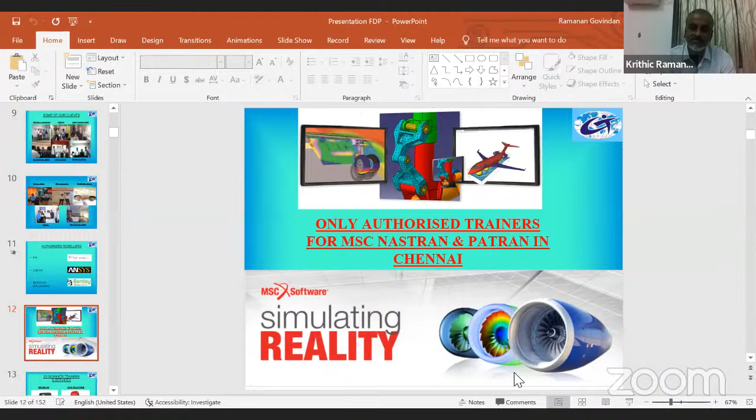And apart from software, we are into hardware too. We are into 3D scanning and 3D printing, which is dominating in today's industrial world. Scanners are widely used in industries for two different purposes: one is for quality checking the product, another is for reverse engineering of parts. Now we have two different scanners—one is Sense 3D, another is the XYZ scanner. Both are handheld scanners.

Now industries use robotic scanners, automated scanners, since the precision is very high and the accuracy is superb. So these are some examples—I have a small video about how scanning is being done in industries.

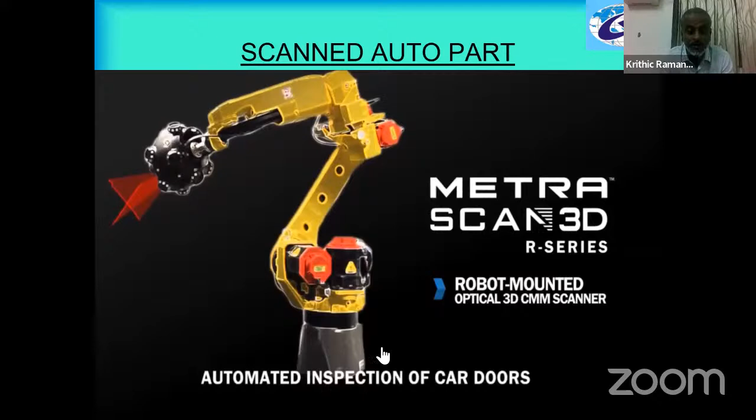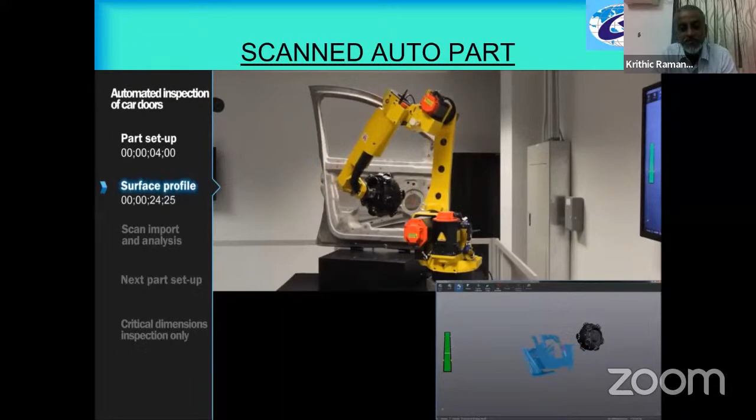This is a simple industrial automated scanner which scans an automotive part, a car part that has been manufactured. To check the quality of the part, in previous ages it was manual testing—we used to check manually using manual measuring instruments, and the accuracy was not that high, so rejections were more when manual testing was done. When automated scanners are used, you can see it is more precise, and the biggest advantage is you need not dismantle the part, which saves the cost of any parts you manufacture.

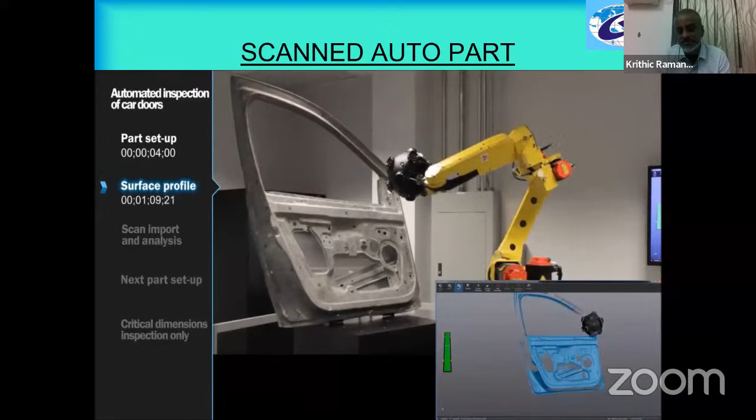Now this is going to be the first prototype. When you scan it, you can understand its assembly interferences, its assembly distances, the weaker areas, and the defects in the design. So anything that has been done or compromised can be analyzed using these robotic scanners available in the market today.

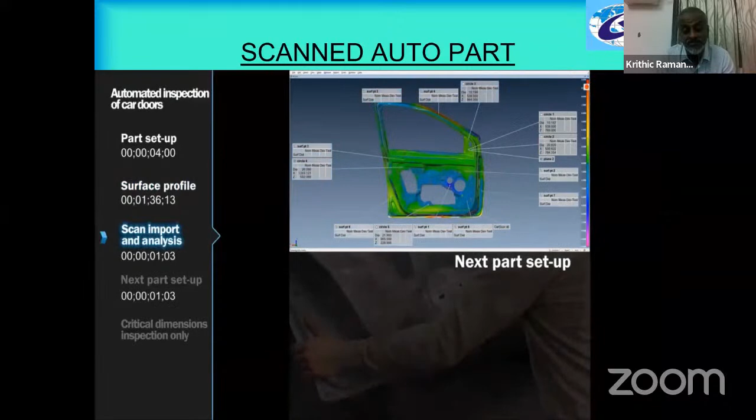So the biggest negative of the rise of scanners is the job market. The job market for men and women, especially in the quality control department, has been deeply compromised because of the introduction of scanners today. So you people have to be versatile in using scanners rather than getting into manual measuring jobs. This is one beautiful example of how scanners are industrially used.

And apart from quality control, what a scanner can do is scan the part, and you can import the scanned object into CAD software like Creo, CATIA, SolidWorks, and any 3D modeling software. You can import the OBJ or object of the scanned part, and that can be converted into a dimensioned part. That is the biggest magic of CAD software—whatever you scan, you can import it into CAD software, convert it into a parametric model, and manufacture it.

So that is where reverse engineering plays a big role, and reverse engineering is one area which all the industries are more focused into, because it's almost like copying.

When me and my partner, we went to China once for a fair called the Canton Fair. We witnessed a lot of Indians visiting the Canton Fair to buy recent products in China, maybe in the agricultural side, the construction domain, or the automotive domain. Very recently developed parts are being bought by industrialists of India.

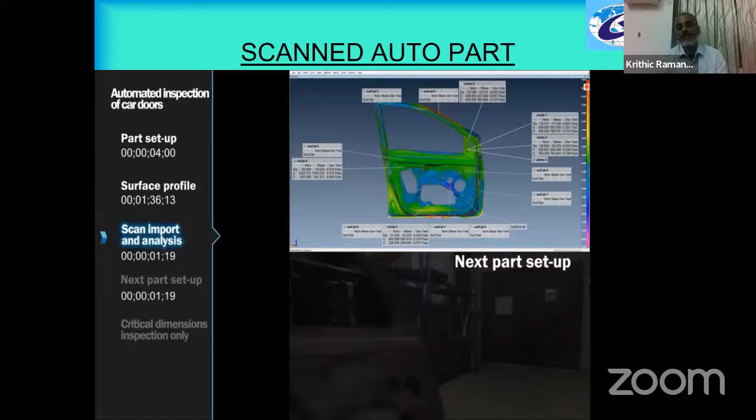When they need those parts, they use scanners to scan them, convert it into an object, import the OBJ into CAD software, do parametric design, and manufacture it. So that is where reverse engineering plays a big role in today's scenario.

That is why I wanted to explain so much, to help you understand the importance of the scanner and the importance of gaining skills and knowledge in using a scanner.

Now, apart from scanners, we are also into 3D printing.

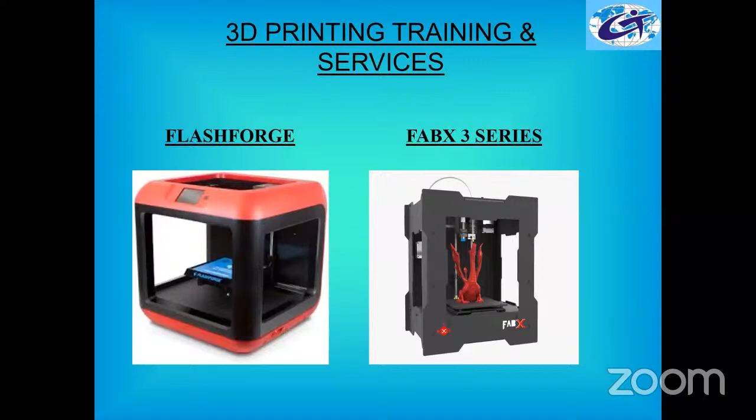But in aerospace, the volume is very less. Aircraft manufacturing companies are going to manufacture 1 or 2 aircrafts in a year probably, so the parts can be easily 3D printed and used.

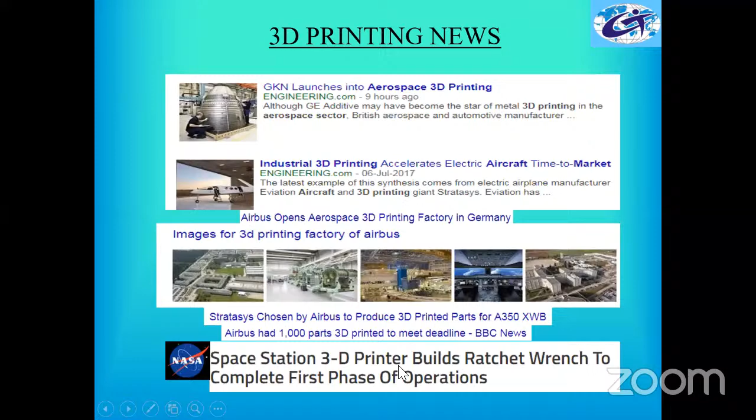Big IT giants like Wipro are into 3D printing - Wipro 3D. HP is into 3D printing machines, and HCL is into additive manufacturing. In fact, HCL has a big 3D printing factory in Bangalore. They have taken orders from various companies and use this factory to 3D print many parts, especially in the aerospace and defense sectors.

We know HCL, Wipro, and HP as IT giants, but they are into engineering services also. This is very good information for engineers to be aware of how these IT sectors are into our CAD domain. It's unfortunate that we people are not focusing on these techniques and getting into such domains. We are more into academics, searching for jobs nowhere connected to us, especially in IT. I humbly request all mechanical, automotive, production, and aerospace engineers to focus on these areas where you have numerous opportunities. But the only thing is, you have to be skillful.

So this is about the 3D printing news. Of course, the project which we have done for a company is Al Jazeera Home Appliances, a Saudi Arabian based company.

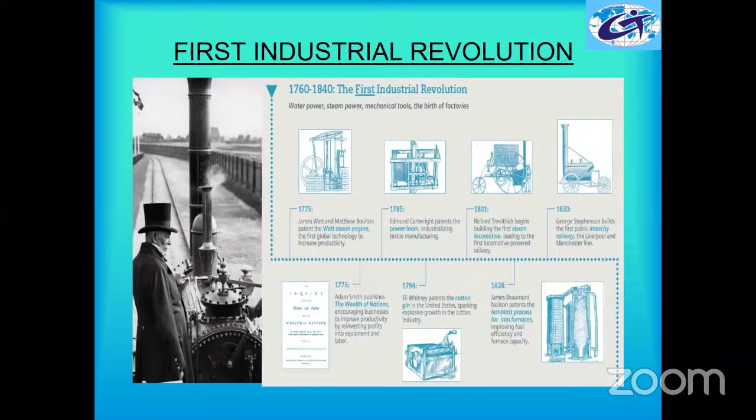So the first industrial revolution was in 1760 to 1840, where water power, steam power, mechanical tools, the factories came into existence. You can see here there are a few examples which we have cited. In 1775 it was the Watt steam engine, 1785 it was the power loom, 1801 it was the steam locomotive, 1830 it was the intercity railway. So these are the few examples which we have cited for the first industrial revolution, which happened during 1760 to 1840.

The second industrial revolution was during 1840 to 1914, where mass production was introduced, because mass production played a big role. Just imagine when you need mass production, how it can be controlled. That's a big thing which people have to take into account. It is not as easy as you think. So when mass production was introduced, Henry Ford started a moving assembly line. And it's very unfortunate that Ford has shut down their car manufacturing division in India, especially in Chennai. So anyway, we are hoping for their electrical vehicle division again. So let us hope for the best. But just imagine, in 1913, Henry Ford introduced the moving assembly line, and in Chicago, the moving assembly line, especially in the meat packing area, was introduced.

Of course, the first wireless communication system was introduced in 1929. So in this particular duration, 1840 to 1914, mass production, the assembly lines, and electrification were introduced to us.

So the third industrial revolution was obviously the digital revolution, a birth of digitization took place. The first mobile phone cellular call was placed in 1973. In 1973, that was my birth year, so now I am 49 years old. Just imagine, before 49 years, the first cellular mobile phone call was placed. So 1947 to 2010 was the digital revolution.

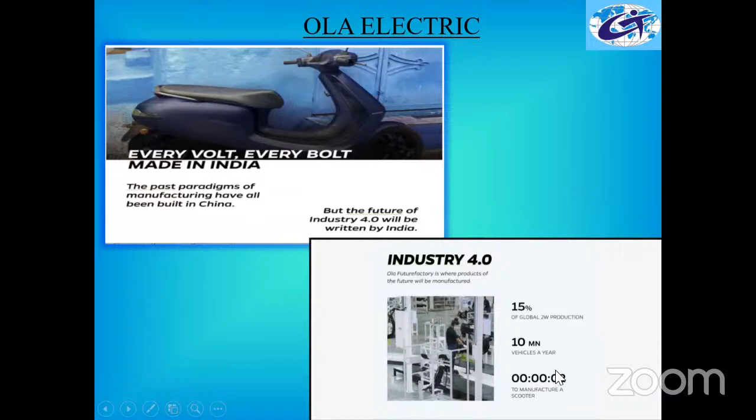And in Industry 4.0, you can see 15% of global 2W production, 10 million vehicles a year, and to manufacture a scooter they take just 2 seconds. So this is what Industry 4.0 does - the time consumption for the product to reach the market will be very less, the profitability of the industry will increase, and you guys have to play a bigger role in this particular environment.

Okay, now I'll get into the basics. I think we have time, I think we have a lot of time. Yeah, we have another 40-45 minutes, isn't it, sir?

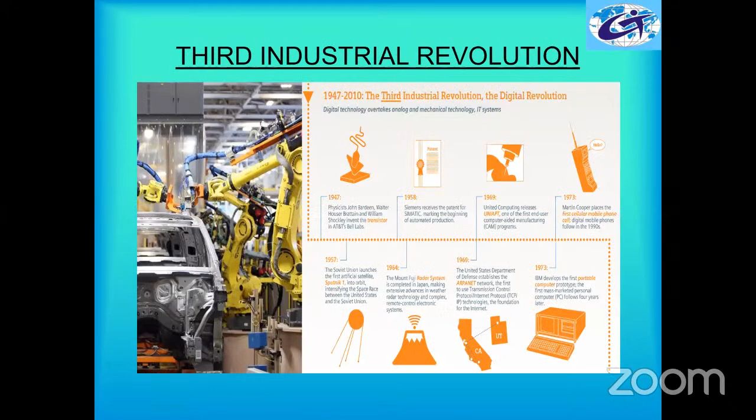And this is the overall dimension you have to maintain. So create a box of the overall dimension, and you have to tune the design which you have done so that the final design is achieved. So conceptual design plays a bigger role in industries today.

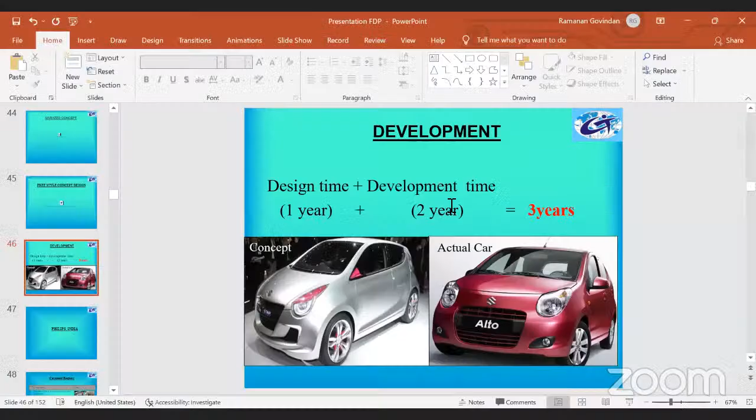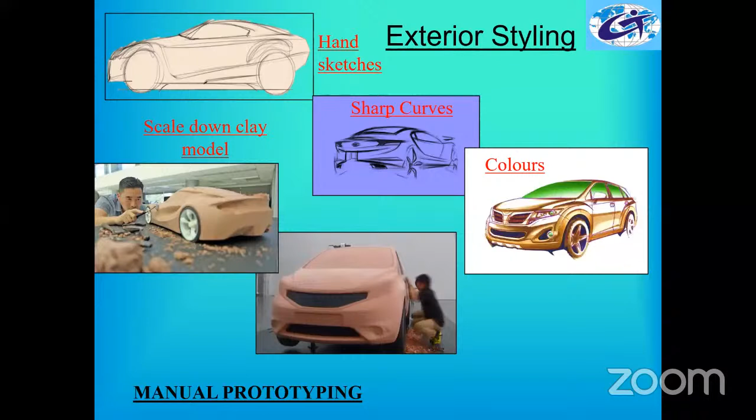This is where I was more particular about insisting to students that there are a lot of openings in R&D, because today, as you all know, electrical vehicles are going to play a big role in the market. So conceptual design of electrical vehicles is very, very important today - the shapes, the aerodynamics, the weight, the battery area - everything plays a big role, and guys who are really good in it are definitely in demand in the market today.

Now, I would like to show you how this conceptual design is being done using softwares - a simple presentation about how they are doing it using the softwares.

Just creating the curves, very easy using the software. This is a rough model, not an exact model. So designers use a sketch tool to sketch the concept of the model they've developed. Especially hand sketches, they convert it into a rough three-dimensional model using a sketch tool. They just free-form it, and use surface design to pull the shapes.

This is how industries do it today. These tools play a bigger role in the market, used prior to the CAD tool. They use such tools to get the shape before the CAD tool, and there are possibilities that these surfaces can be imported into the CAD model.

This is the information I want to share about conceptual design in industries - the software used in developing freeform surfaces, so that the complete car model has been done dynamically. Now in R&D, when they develop an automotive concept, the design and development time takes around 3 years.

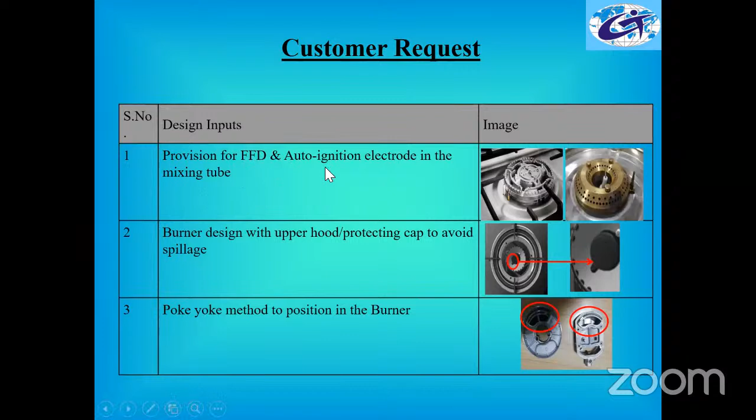This is one conceptual design we did for Preethi Home Appliances - the provision of a flame failure device, auto ignition electrode in the mixing tube, and the burner design with the upper hood. These are some of the modifications we made in the existing design of gas stoves. For the flame failure device and ignition electrode, this technique is called poka-yoke - a Japanese technique where you can place the burner on the hood.

So we have to place the burner on the hood so it gets fixed and shouldn't be easily taken away. That's why we use a technique called poka-yoke.

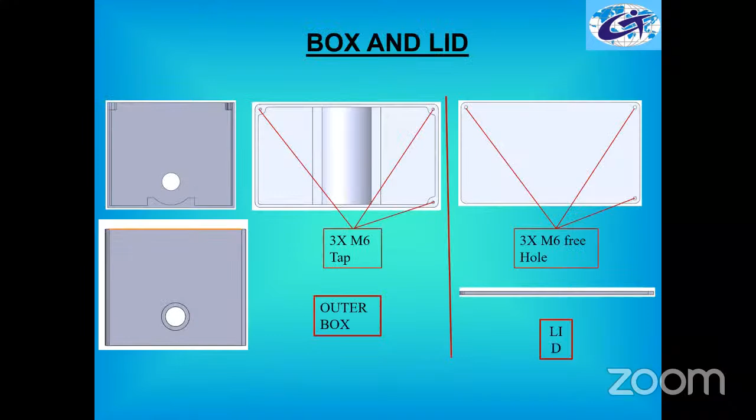This is another design we did during the COVID time - a ventilator design for a client. This project was submitted to the state government, and they 3D printed this particular part and submitted it to the government. We played a big role in designing this particular ventilator.

The next concept I'd like to discuss is reverse engineering, and after this I'll get into the software. As I mentioned earlier about reverse engineering using scanners - you can scan an automotive part, develop the part, and incorporate it into recent vehicles. So reverse engineering is one area where you can re-engineer components.

Now here, this is CMM data - CMM is coordinate measuring machine data of a helmet. When a helmet has to be reverse engineered, can we take the dimensions of the helmet? No, it's difficult. You cannot take dimensions of any component that way. There are only a few parts that can be dimensioned using vernier, scale, or other manual measuring instruments, but apart from that, all other components cannot be dimensioned - they are aerodynamic in shape, and such shapes have to be dimensioned using measuring instruments.

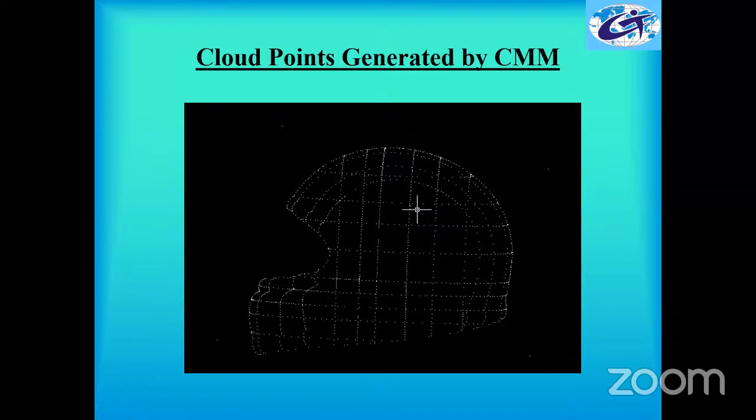I think Sairam groups have a CMM machine also in the college. So this particular data is a CMM of a helmet - you can see it's been taken as points, all three-dimensional points. You can rotate these points in the software, and it will look exactly like a helmet, but these are all just points.

So these points have to be imported into CAD software like CATIA. We imported this in CATIA, where we can convert these points into wireframes - we call it wireframe design. You connect those points to create smoother wireframes. The wireframes have to be smoother, and that's where the designer has to play a bigger role.

Now these smoother wireframes can be converted into surface designs. You can see here, this is a surface model. A surface model is a volumeless model - it doesn't have any thickness.

But converting it as a smoother surface plays a bigger role. It needs a lot of patience and intelligence. You cannot make it smoother just like that, you need a lot of techniques. So software helps you to create smoother surfaces.

Now this is how the helmet can be created in CAD software, from reverse engineering data to the CAD software data. After creating this reverse engineered model, I'm getting into the next concept.

So we were talking about CAD, product development, 2D to 3D conversion, conceptual design, and reverse engineering. These are the three techniques through which you can design the part. So the component is being designed now, I'm talking about the helmet. We have reverse engineered the helmet.

What is the next step after design? The next step after design is CAE. We have to validate the helmet. Whatever component you are designing, let it be anything, you have to validate the part so that it withstands the loading conditions.

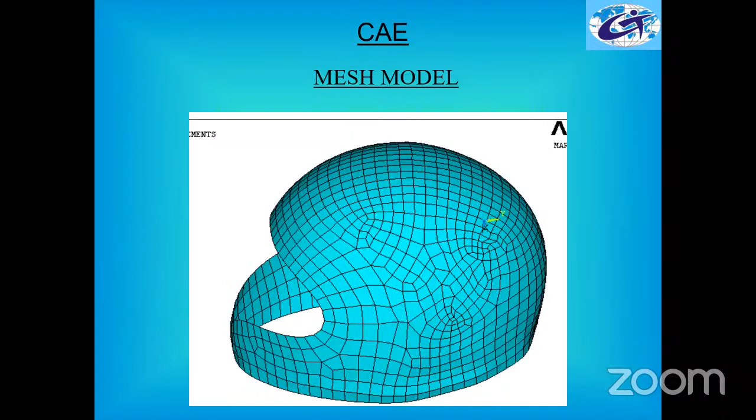Now here, the helmet has a specific purpose. It has to withstand load, it has to be aerodynamic, it has to be lightweight. So keeping these things into consideration, we have to decide the material and the design. So after the design is over, you have to go for validation.

Now here we are doing a drop test for the helmet to find whether it can withstand the load, because the purpose of the helmet is very clear: it has to withstand impact and reduce damage to the skull. So we do a drop test. If the helmet is fine, then we have to go for manufacturing it.

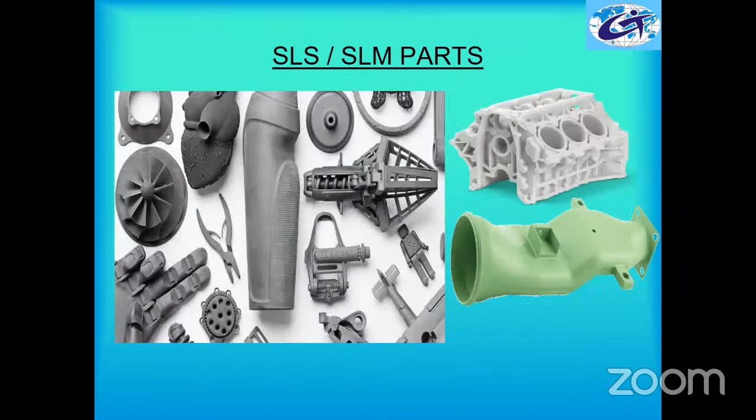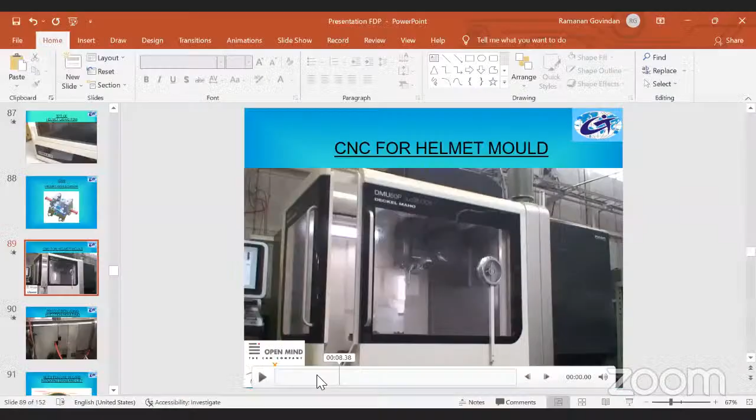So when the mold design is ready, I have to go for CNC manufacturing of the mold. The mold has to be CNC manufactured, so I have to write the G codes and M codes in the software. We call these the CNC codes for the mold, and that particular mold can be manufactured using the CNC machine. So this is where additive and subtractive techniques are being used.

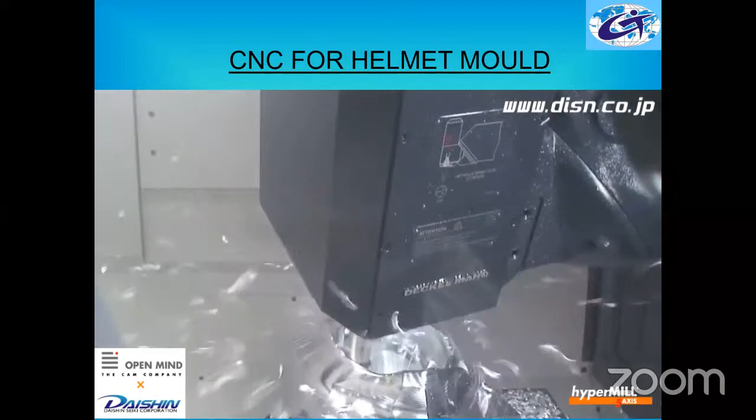So subtractive technique is used here in manufacturing the mold of the helmet. Additive was used in taking the prototype of the helmet. Additive is nothing but adding material, I added material and developed a 3D printed part of the helmet. Here I am subtracting material and creating the mold for the helmet. So this is how the helmet mold is being manufactured.

So after the helmet mold is manufactured, I can get into the next thing, which is called the injection molding of the helmet. You can see here the mold which has been CNC machined is being loaded in the injection molding machine, and you get the molded part, which is the helmet.

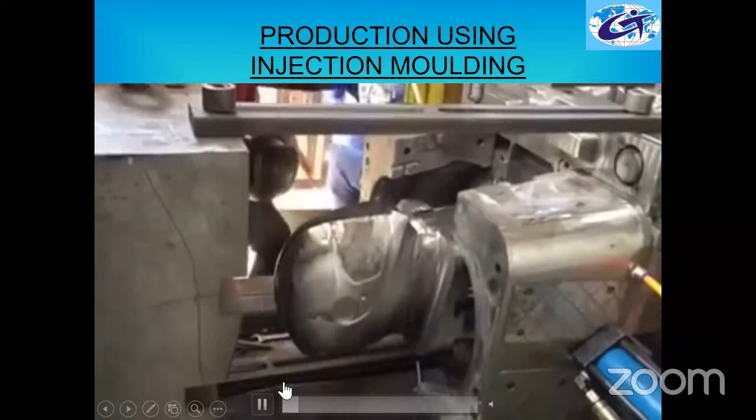So this is how helmets are being 3D printed in industries, molded in industries. You can see this is the complete mold which has been manufactured using the CNC. So in the injection molding machine, as the mold opens, the helmet is being manufactured.

So this is how the complete CAD/CAM/CAE process is being done. Product development is CAD, product validation is CAE, and CAM is used to manufacture the mold of the helmet. After the manufacturing is done, the mold is loaded in the molding machine, and the helmet is manufactured.

So this is a very small example which I want to cite for CAD/CAM/CAE and this application. Now I would request Karthik sir to share his screen.

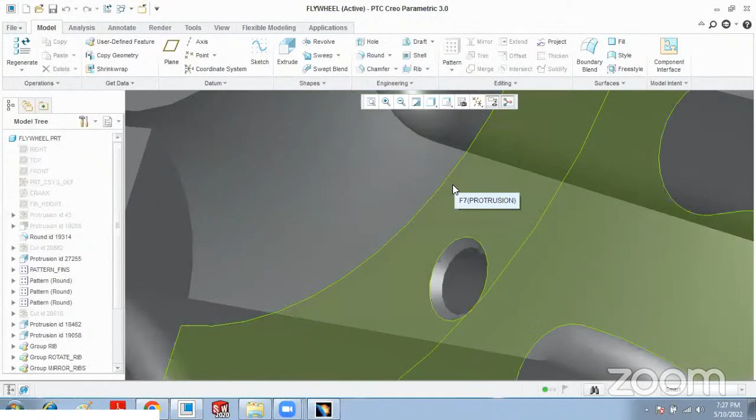So that we can show how softwares are being used to design components. Initially we will be showing you Creo, where Karthik sir will explain how simpler parametric 3D modeling designs are done. After that we'll get into CATIA, where we want to show how conceptual design is done in industries. We planned for 3-4 softwares, but as time is limited, we'll show you the two most dominant softwares in today's manufacturing world.

Now this is Creo. This is a simple industrial flywheel. Karthik sir will show how a few features of this flywheel can be designed using Creo software, along with a simple introduction to the software.

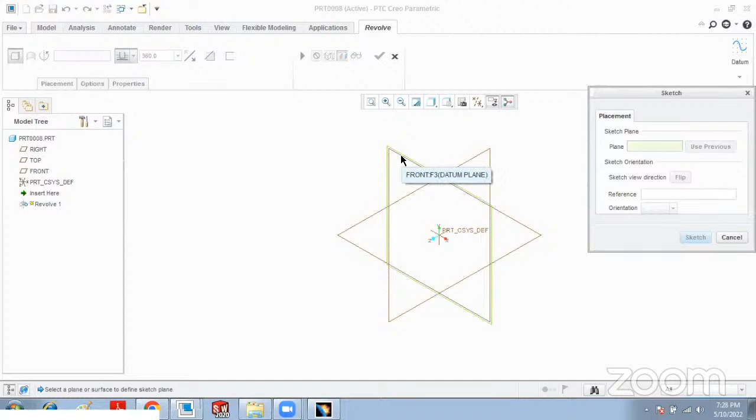This is one of the most dominant tools in today's market. In all automotive and consumer product sectors, this software plays a bigger role. It's widely used for dimensioned parts, parts which can be dimensioned easily. People will go for this software, or of course SolidWorks, another equally competitive software. Creo and SolidWorks play a bigger role.

Now you can see Karthik sir is designing the base of the flywheel. The base is nothing but a simple sketch which can be revolved with reference to a center axis. These are the dimensions of the sketch. You can see when the dimensions are modified, the geometry gets updated.

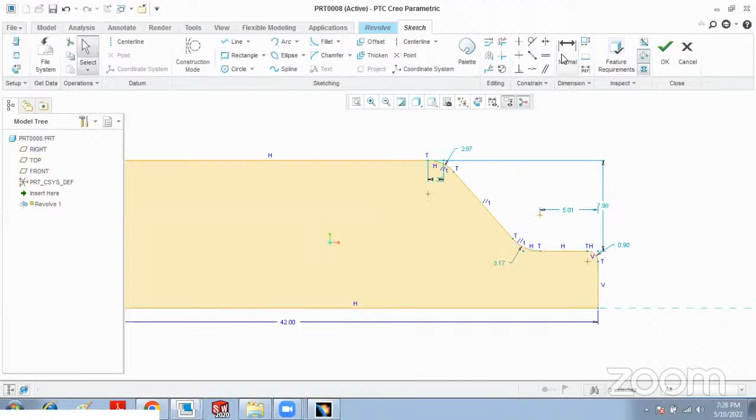That is the biggest advantage of software today. When you modify the dimension, the geometry changes - we call it parametric. At any point of time, you can modify the dimensions. That is the biggest time saver in today's scenario. Software saves you a lot of time, that's the biggest thing here.

As the components are dimensioned exactly, the next step is to get a solid body. This is a 2-dimensional sketch, which we revolve with reference to a center axis so that I get the base of the flywheel. This is the solid part, the base of the flywheel. Any angle can be given, but here we need a complete revolution, so we make it 360 degrees for the revolution angle.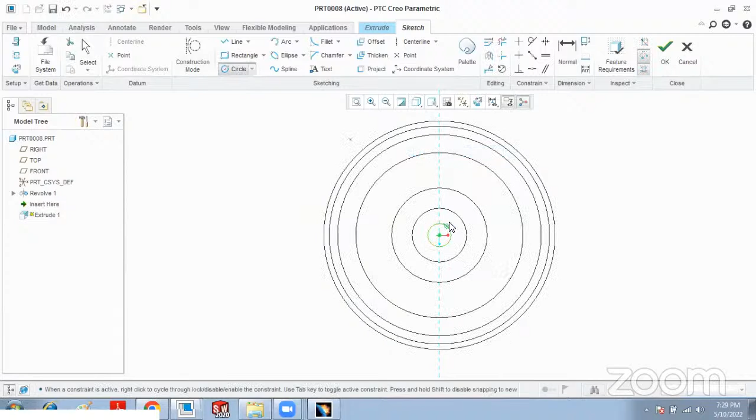Now over the base we are creating a simple cylindrical part. We change the diameter of the circle, and the circle, when material is added, becomes a cylinder. So fast you can create any part. We call this a feature-based tool - we can create any number of features, one after another, so it becomes a single object.

Now the sharp corner is being filleted so the surface becomes smoother and more aerodynamic. We call it fillet - you can fillet the sharp corner and enter the radius so it becomes smoother.

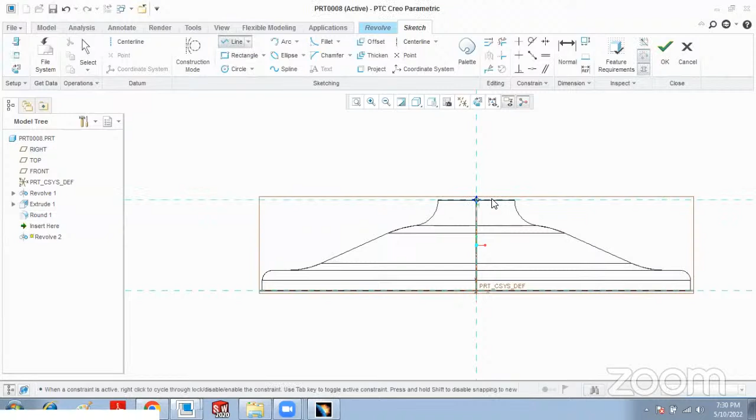Now if I want to remove material in between so the flywheel can be fixed in the assembly, I need a hole in between. I can create a tapered section, and this section can be removed - just like machining, I can ask the software to cut the revolved object. So I revolve the object sketch, cut the object, and get a hole underneath which can be used to fix this flywheel in the engine assembly.

Now the most important part here - talking about any object, for the flywheel, the most important part is the blade. So for the blade of the flywheel, we created two different arcs - the first arc and the second arc - and we connect both arcs at a certain depth.

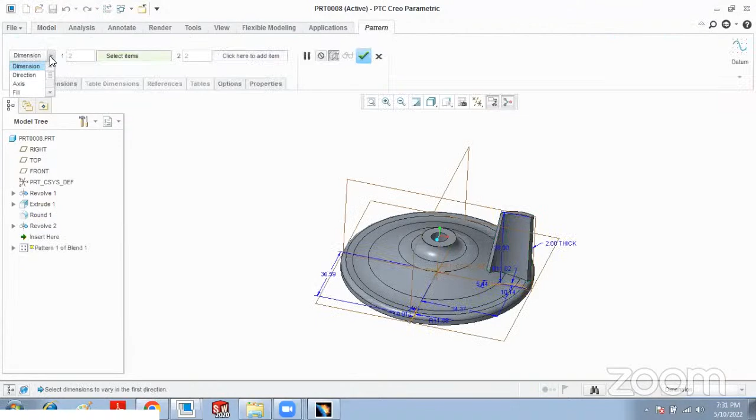So we get a blade. Take any object - a turbine, a compressor, propellers - you need blades. So blades play a bigger role today.

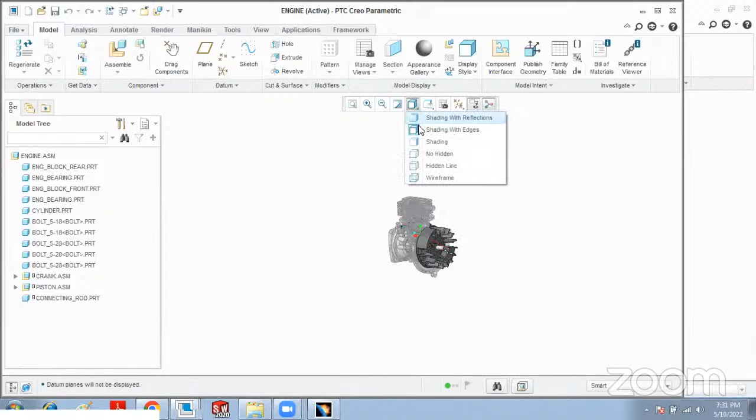He does wonders in software. This is the assembly environment where the flywheel is being fixed in the engine. The biggest advantage of assembly is you can check the interferences and clearances of each part, both in static condition as well as in dynamic condition.

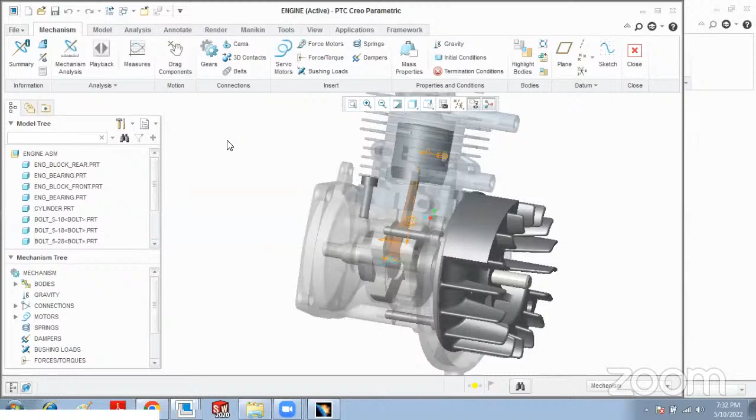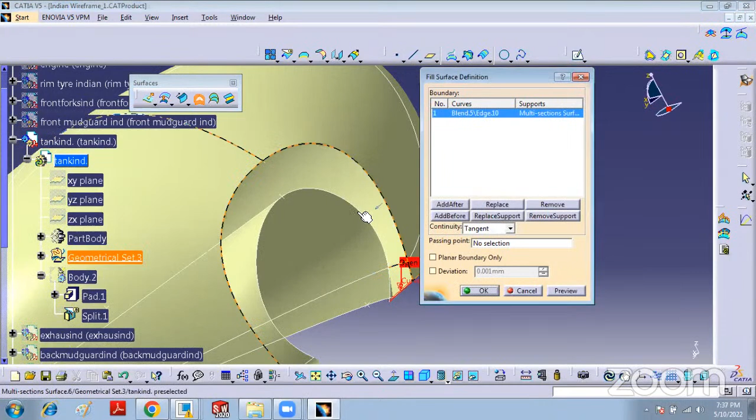சின்ன சின்ன ஆப்ரேஷன்ஸ் தான், வெரி மைன்யூட் ஆப்ரேஷன்ஸ். பண்ணுறதுக்கு அவ்வளோ இன்ட்ரெஸ்டிங்காக இருக்கும். Because when you create the shape, when you see how the shapes are being created, it will be so interesting to you. இப்போ நாங்கள் என்ன பண்ணிட்டோம்னா எல்லாமே சர்ஃபேஸில் க்ரியேட் பண்ணியிருக்கோம்.

சர்ஃபேஸ் டிசைன் சொல்லுவோம். அது எல்லாத்தையும் ஒன்றாக்கிட்டோம், யுனைட் பண்ணிட்டோம். யுனைட் பண்ணிவிட்டு இப்போ டோட்டல் பாடியும் நாங்கள் ஓப்பன் பண்ணுறோம். இதான் அந்த டோட்டல் புல்லட் டிசைன். புல்லட் டிசைனில் நம்ம வரைஞ்ச சர்ஃபேஸ் வந்து அழகாக ஒரு இடத்துல உட்காந்துட்டுருக்கு. இதுதான் வி கால் இட் அஸ் டாப் டவுன் டிசைன் சொல்லுவாங்க.

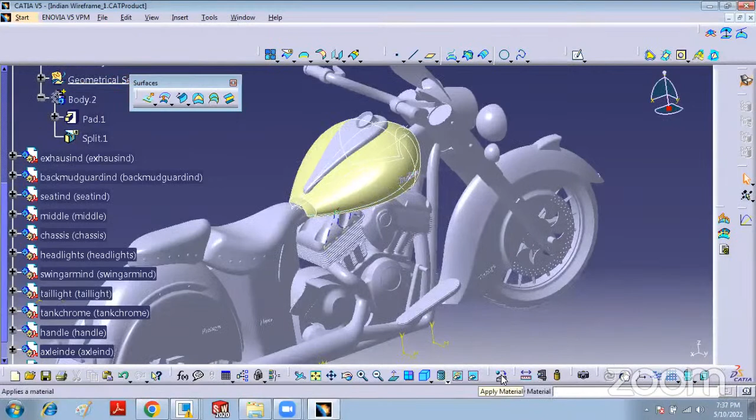அதாவது எல்லாமே வரைஞ்சிட்டு நம்மளுக்கு தேவையான பாகங்களை அங்கங்கே வைக்கிறது, ப்ளேஸ் பண்ணுறது. நான் புல்லட்டை டோட்டலாக வரைஞ்சிட்டேன், எனக்கு அந்த டேங்க் கவர் மட்டும் வேணும். ஸோ நான் டேங்க் கவர் மட்டும் தனியாக டிசைன் பண்ணுறேன். இப்போது ஐ கேன் ஆல்சோ பெயிண்ட் இட். So that's the biggest advantage here. So whatever colors you want, you can dynamically place it to the surface so that it gets painted.

உங்களுக்கு பார்த்தீங்கன்னா இப்போ தெரியும், கம்ப்ளீட்டாக அந்த லோகோவோடே இருக்கும். அந்த லோகோ காட்டுங்க கார்த்திக் சார். Yes, you can see the logo also. It's called Indian. Indian உங்களுக்கு தெரியும், bullets தெரியும். So it's a foreign bike.

ஹார்லி டேவிட்சன் எடுத்துக்கலாம் நீங்கள், இல்லை நம்மளோட ராயல் என்ஃபீல்டு எடுத்துக்கோங்க. ராயல் என்ஃபீல்டோட டேங்க் கவர்ஸ், you see how they have designed it. ஸோ எல்லாமே இந்த மாதிரி கான்செப்ஷுவல் டிசைனில் தான் பண்ணணும். திஸ் இஸ் ஒன் சச் சாஃப்ட்வேர். CATIA is one such software where you can do such beautiful designs.

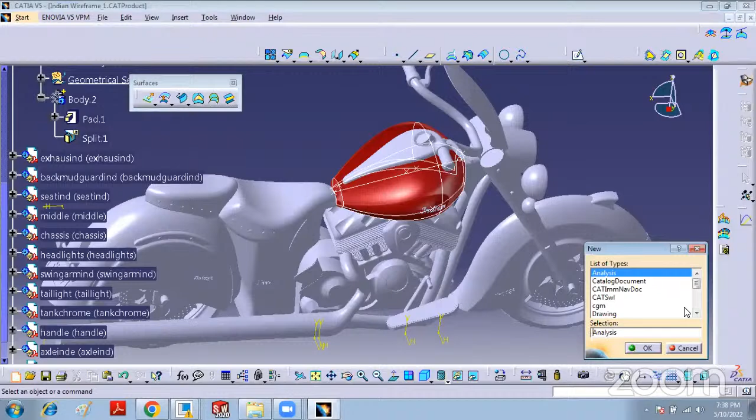Aerodynamic designs க்கு CATIA is one fantastic tool. இந்த டிசைன் வந்து இது ஒரு டாப் டவுன் டிசைன் அப்படின்னு ஒரு கான்செப்ட். ப்ராடக்ட் டிசைனில் இது ஒரு பியூட்டிஃபுல் ஏரியா, டாப் டவுன். இன்னொன்று இந்த R&D-யில் நான் வந்து ஹேண்ட் ஸ்கெட்சிலேருந்து எப்படி கான்செப்ட் டெவலப் பண்ணுறாங்கன்னு we were discussing about that. அது எப்படி பண்ணலான்னு சொல்லி இப்போ கார்த்திக் சார் காட்ட சொல்கிறேன்.

இப்போ நாங்கள் பார்த்தீங்கன்னா ஒரு காரோட மாடல், ஒரு இமேஜஸ் ஆஃப் கார், ஒரு 4 வியூ எடுத்துக்கிறோம். இது எங்களோட ஒரு ஃப்ரண்ட் வியூ ஆஃப் அ ஹேண்ட் ஸ்கெட்ச், ஒரு ஃபோட்டோகிராஃப்னு கூட வச்சுக்கலாம். ஒரு ஆடியோட காரோட ஃப்ரண்ட் வியூ, ஒரு ஹேண்ட் ஸ்கெட்ச் தான் இது. ஹேண்ட் ஸ்கெட்சு நல்லா பக்காவாக ஸ்கெட்ச் பண்ணுது.

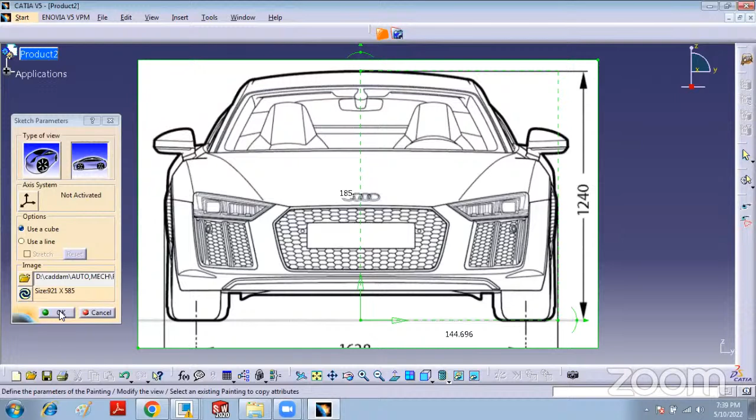இதை நாங்கள் என்ன பண்ணுறோம், we are just importing it into CATIA software. We are designing the basic parameters like the scale of the sketch. நாங்கள் முதல்ல டிசைட் பண்ணுறோம், XY ஸ்கேல் எவ்வளோ இருக்கணும் அப்படின்னு டிசைட் பண்ணி அதை முதல்ல ஒரு ஃபஸ்ட் இமேஜ் இம்போர்ட் பண்ணுறாரு சார். இது இமேஜ் தான், இமேஜை வந்து CATIA-வில் இம்போர்ட் பண்ணிட்டார்.

இப்போ 2வது இமேஜ் இம்போர்ட் பண்ண போகிறார், which is the side view of the car. பாருங்கள், சைட் வியூ ஆஃப் த கார் இம்போர்ட் பண்ணிட்டாரு. எப்படி வந்து ஹேண்ட் ஸ்கெட்சை வந்து 3D மாடலாக பண்ணுறாங்க சாஃப்ட்வேர்லன்றதுக்கு இதுதான் பெஸ்ட் எக்ஸாம்பிள்.

இப்போ அகைன் இந்த சைட் வியூ ஆஃப் த ஹேண்ட் ஸ்கெட்சை வந்து காரோட ஹேண்ட் ஸ்கெட்சை வந்து ஸ்கேல் பண்ணுறோம், X and Y டைமென்ஷனை ஸ்கேல் பண்ணுறோம். யூ ஹேவ் டு மேக் ஷுர் எவ்ரி ஹேண்ட் ஸ்கெட்ச் ஹாஸ் பீ ஈக்குவலி ஸ்கேல்டு. இப்போ பாருங்கள், ஃப்ரண்ட் வியூ அந்த ரைட் சைட் வியூவை ஈக்குவலாக ஸ்கேல் பண்ணியிருக்கோம். யூ கேன் ட்ராக், நீங்கள் எங்கே வேணாலும் ப்ளேஸ் பண்ணிக்கலாம், ஃப்ரண்ட் வியூவும் ரைட் வியூவும். பட் அதோட கோஆர்டினேட்ஸ் நம்ம ஃபிக்ஸ் பண்ணணும்.

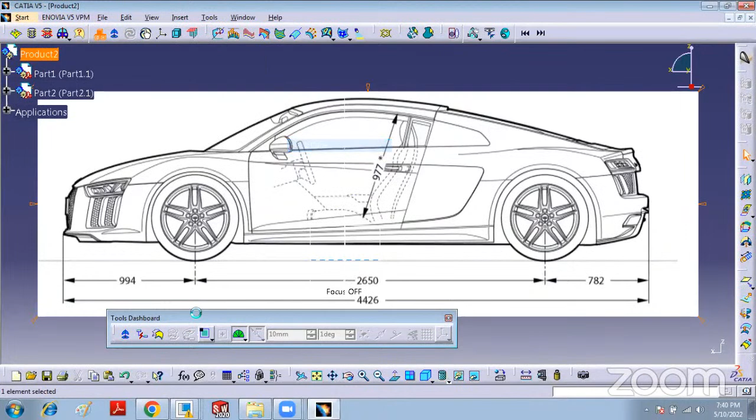எங்கே கோஆர்டினேட்ஸ் ஃபிக்ஸ் பண்ணுறோமோ அங்கே தான் அது வந்து நம்மளால் வரைய முடியும். இப்போ நார்மலாக இந்த மாதிரி இமேஜை இம்போர்ட் பண்ணிவிட்டு நெக்ஸ்ட் ஆப்ஷன் என்னன்னு பார்த்தீங்கன்னா we have to sketch. இப்போ நம்ம கான்செப்ஷுவல் டிசைன் எப்படி வரைகிறதுன்னு சொல்லி ஒரு சின்ன வீடியோ நான் காமிச்சேன். அப்போ வந்து ஒரு ஸ்கெட்ச் டூல் வச்சு ஸ்கெட்ச் பண்ணாங்க, நீங்கள் பார்த்தீங்க. சேம் வே CATIA-வில் இமேஜை இம்போர்ட் பண்ணிவிட்டு we are going to sketch the external of the car.

the external boundary என்ன பண்ணுறோம், டைனமிக்காக 3D spline வந்து ஸ்கெட்ச் பண்ணுறாரு. You can see here Karthik sir is dragging 3D spline along the boundary of the cars. It's very difficult. Of course, it's a time consuming job.

இப்போ நம்ம ப்ரெசன்டேஷன்னால he is doing it faster. பட் நீங்கள் ரியல் டைமாக பண்ணும்போது இவ்வளோ தூரம் வரைகிறதுக்கே உங்களுக்கு 15-20 days ஆயிரும். பிகாஸ் யூ நீட் இட் மோர் ஸ்மூத்தர். உங்களுக்கு ஸ்மூத்தாக இருக்கணும், அப்ஸ் அண்ட் டவுன்ஸ் இருக்கக்கூடாது, ரொம்ப கேர்ஃபுல்லாக நீங்கள் ஸ்கெட்ச் பண்ணணும்.

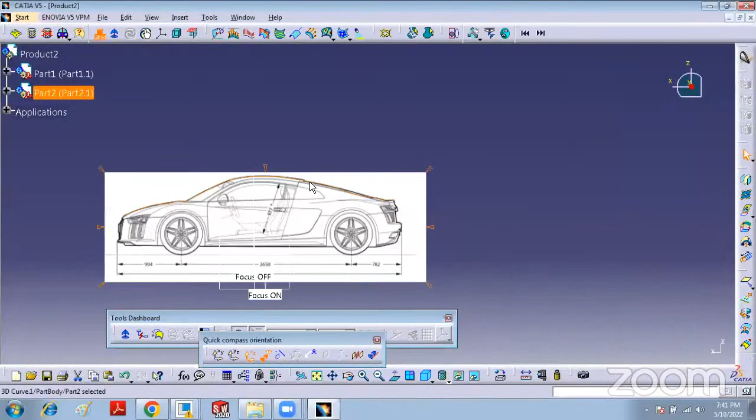இப்போ அந்த ஸ்கெட்ச் பண்ண கர்வை வந்து is going to give a color and is going to increase the thickness for the clear visibility. பார்த்தீங்கன்னா உங்களுக்கு தெரியணுன்றதுக்காக, இப்போ ஆடியன்ஸ்க்கு அது விசிபிளாக இருக்கணுன்றதுக்காக thicken it. நவ் இஸ் கோயிங் டு கோ டு த ஃப்ரண்ட் வியூ. ஃப்ரண்ட் வியூலையும் ஒரு ஸ்கெட்ச் வரைய போகிறோம். வி வாண்ட் டு ஷோ how the sketches can be created in different views.

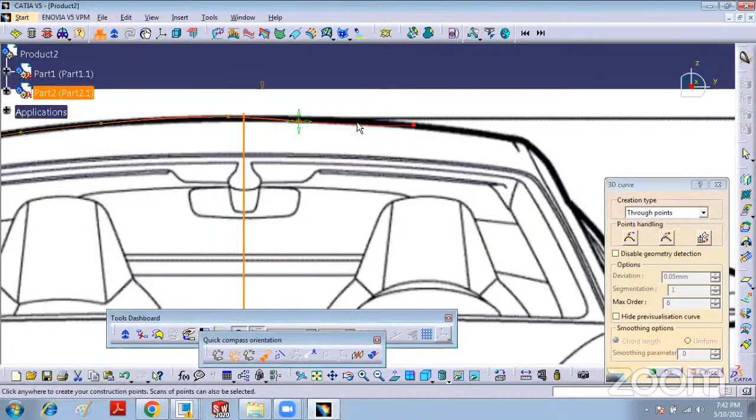அந்த ஸ்கெச்சஸை வச்சு எப்படி நம்ம நெக்ஸ்ட் ஸ்டெப் பண்ணணும், ஆர் வி கால் இட் அஸ் மாஸ்டர் ஜாமெட்ரி. மாஸ்டர் ஜாமெட்ரி எப்படி க்ரியேட் பண்ணலாம், இண்டஸ்ட்ரீஸில் எப்படி பண்ணுறாங்க அப்படின்றதை we are going to show here. That is the idea behind this particular presentation. இப்போ அவர் எக்ஸ்டர்னல் பவுண்டரியை ஃப்ரண்ட் வியூவில் க்ரியேட் பண்ணுறார். அதே மாதிரி 3D spline அப்படியே ட்ராக் பண்ணி அப்படியே வரைகிறாரு. வரைஞ்சி முடிச்சுட்டு ஓகே சொல்லிட்டு he is going to give a thickness to this curve.

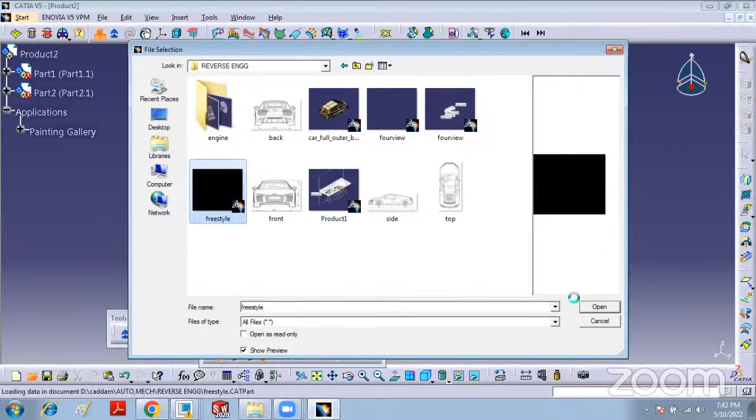ரெண்டு கர்வுக்கும் திக்னஸ் கொடுக்குறாரு. கொடுத்துட்டு அந்த இமேஜை நாம் ஹைட் பண்ணிடலாம். இப்போ நம்ம கர்வ்ஸ் எவ்வளோ வேணால் வரையலாம். எனி நம்பர் ஆஃப் கர்வ்ஸ் யூ கேன் கிரியேட் அண்ட் யூ கேன் ஹைட் த இமேஜ் ஸோ தட் யூ வில் ஹேவ் ஒன்லி கர்வ்ஸ் இன் த ஸ்க்ரீன். இது கம்ப்ளீட்டாக வரைஞ்சால் எப்படி இருக்கும்னு பார்த்தீங்கன்னா, நாங்கள் ஏற்கனவே வரைஞ்சிருக்கோம், அதை காட்டுறோம். இந்த மாதிரி யூ ஹேவ் டு கிரியேட் n நம்பர் ஆஃப் கர்வ்ஸ். இது மாதிரி தான் கர்வ்ஸ் வரும்.

நீங்கள் ஒரு கர்வாக வரைய யூ கேன் get the model like this - ஒரு wireframe of a body of a car. You can get a wireframe of a body of a car. So this wireframe has to be converted as a surface model. So we use an option which is called as generative shape design.

இந்த மாதிரி ஆப்ஷன்ஸ் எல்லாருனாலையும் வந்து எடுக்க முடியாது. Only you need expertise to teach you, to train you in these concepts. So we are always good enough in such areas. இந்த மாதிரி ஒரு கர்வையும் நீங்கள் கனெக்ட் பண்ணி யூ கேன் கிரியேட் இட் ஆஸ் சர்ஃபேசஸ். யூ கேன் கிரியேட் த பாடி ஆஃப் த கார்ஸ்.

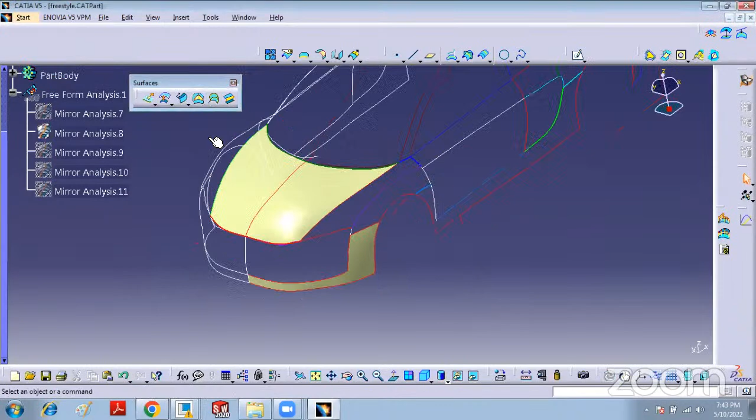இப்படி தான் நியூ ப்ராடக்ட் டிசைன் பண்ணுவாங்க. கார் மட்டும் கிடையாது, எனிதிங் யூ டேக். நீங்கள் ஃப்ரிட்ஜ் எடுத்துக்கிட்டாலும் சரி, ஏசி எடுத்துக்கிட்டாலும் சரி, டிவி எடுத்துக்கிட்டாலும் சரி, ஐ டோன்ட் சே ஈவன் மொபைல் ஃபோன் எடுத்துக்கிட்டாலும் சரி தான் இப்படி தான் இருக்கும் கம்ப்ளீட்டட் டிசைன். நீங்கள் ஒன்றா பண்ணி ஃபினிஷ் பண்ணும்போது இப்படி வரும். இன்னும் நீங்கள் ஸ்மூத் பண்ணணும். ஸ்மூத் பண்ணிங்கன்னா தான் உங்களுக்கு எக்ஸாக்ட் டிசைன் வரும். லாட் ஆஃப் ஆப்ஷன்ஸ் ஆர் தேர் இன் சாஃப்ட்வேர்ஸ் வேர் யூ கேன் மேக் த சர்ஃபேஸ் ஸ்மூத்தர்.

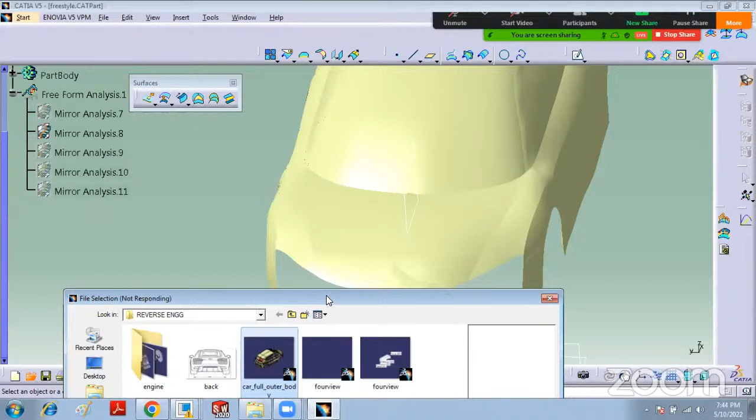இப்போ நீங்கள் ஒரு கம்ப்ளீட்டட் மாடல் நான் காட்டுறோம். இது இன்றைக்கி மார்க்கெட்டில் இருக்கிற ஒரு வெஹிக்கிளோட நியூமெரிக்கல் மாஸ்டர் ஜியோமெட்ரி இப்படி தான் பண்ணாங்க. இந்த கிளையண்ட் இஸ் வெரி க்ளோஸ்லி அசோசியேட்டட் வித் திஸ். அவங்களுக்கு நிறைய ஆக்டிவிட்டீஸ் பண்ணிகிட்ருக்கோம். இன்றைக்கும் அந்த கம்பெனிக்கு நாங்கள் நிறைய மேன் பவர் சப்ளை பண்ணிகிட்ருக்கோம். So I can show you the numerical master geometry of that particular model. கொஞ்சம் டைம் ஆகுது, மிஷின் கொஞ்சம் நிறைய சாஃப்ட்வேர்ஸ் ஓப்பனாக இருக்கிறதுனால இட்ஸ் டேக்கிங் லிட்டில் பிட் டைம்.

எனிவே, இதே கான்செப்ட் தான் ஹேண்ட் ஸ்கெட்ச் ஆர் ஃபோட்டோகிராஃப். அதை அப்படியே இம்போர்ட் பண்ணணும் சாஃப்ட்வேரில். இம்போர்ட் பண்ணி எங்கெங்கெல்லாம் கர்வ்ஸ் வரைய முடியுமோ எல்லா கர்வ்ஸ் நீங்கள் சாஃப்ட்வேரில் யூ ஹேவ் டு ட்ரா. அந்த கர்வ்ஸ் ஹேவ் டு பி ஸ்மூத்தர். The curves should intersect each other. Intersect பண்ணால் தான் நீங்கள் வந்து ஒரு சர்ஃபேஸ் மாடல் பண்ண முடியும். இன்டர்செக்ட் பண்ண வச்சுட்டு unnecessary unwanted elements எல்லாம் delete பண்ணிவிட்டு you create a wireframe model. The wireframe model has to be converted as a surface.

So this one model, இந்த கார் வந்து இப்போது it's there in the market. It's a Nissan product. நீங்கள் பார்த்துருப்பீங்க, பார்த்துருப்பீங்கன்னு நினைக்கிறேன் இல்லைங்களா? So this particular car is being designed and manufactured using these particular concepts. Complete concept இதுதான். Datsun Go. நீங்கள் அந்த மாடல் தெரியலன்னா நான் சொல்கிறேன், Datsun Go தான் அந்த பர்டிகுலர் மாடல்.

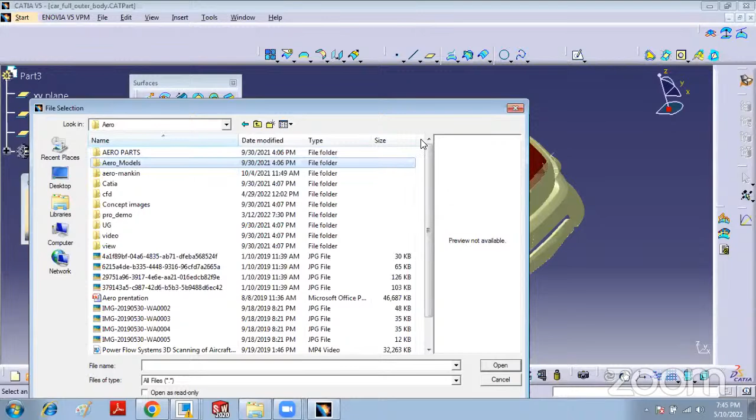இப்போ இதில் we want to show you something. கார்த்திக், அந்த இது காட்டலாமா? மேன்கின் தான் காட்டுறியா கார்த்தி? அப்படி மேன்கின் காட்டலாமே. இதில் ஒரு சின்ன விஷயங்கள் நம்ம பார்க்கலாம்.

we call it as ergonomic design சொல்லுவோம். எர்கனாமிக்ஸ் வந்து எப்படி நம்ம டிசைன் பண்ணலாம், ஒரு டிரைவர் இருக்காருன்னா டிரைவருக்கு எவ்வளோ கன்வீனியன்ஸ் நம்ம கொடுக்கணும், அவருக்கு சீட் எவ்வளோ வைக்கலாம், எவ்வளோ தூரம் வரைக்கும் கால் எக்ஸ்டெண்ட் பண்ணலாம், கியர் லீவர் எங்கே வைக்கலாம், இது பேர் தான் எர்கனாமிக் டிசைன் சொல்லுவாங்க. வெரி வெரி இம்பார்ட்டன்ட் இன் ஆட்டோமோட்டிவ். எந்த வெஹிக்கிள் எடுத்திங்கனாலும் எர்கனாமிக் டிசைன்ன்றது பிளேஸ் அ வெரி பிக் ரோல்.

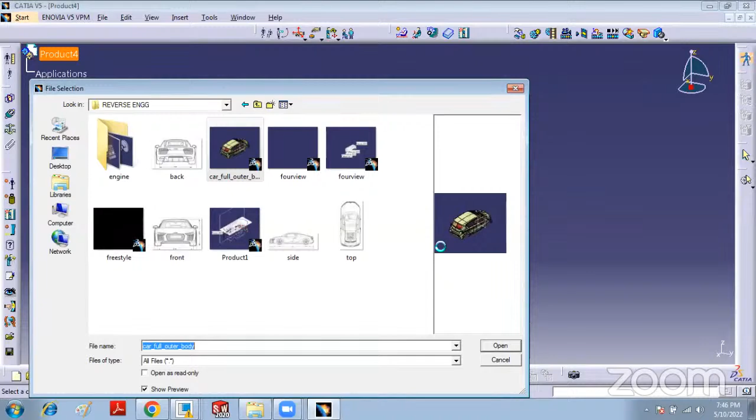அதுக்கு வந்து தட்ஸ் அ பியூட்டிஃபுல் மாடியூல் இன் CATIA, we call it as manikin design. ஒரு ஹியூமனை இம்போர்ட் பண்ணி வச்சுக்கிட்டு, அவரை டிரைவர் சீட்டில் உட்கார வச்சு அவருக்கு தேவையான மூமெண்ட்ஸ் கொடுக்கும்போது அவருக்கு கம்ஃபர்ட் ஜோன் எப்படி இருக்குதுன்றதை நம்ம எவால்வேட் பண்ணி அதுக்கப்புறம் we have to incorporate the interiors in the car. அதுதான் வந்து the beautifulness of software தான்.

இப்போ பார்த்தீங்கன்னா திஸ் என்வரான்மெண்ட் இஸ் கால்ட் அஸ் மேன்கின் என்வரான்மெண்ட். பார்த்தீங்கன்னா தெரியும். இதில் சார் என்ன பண்ணுறாருன்னா இம்போர்ட்டிங் ஒரு ஹியூமனை இம்போர்ட் பண்ணுறாரு, ஒரு சின்ன ஸ்ட்ரக்சர் ஆஃப் எ ஹியூமன்.

இது வந்து நம்ம இப்போ இந்தியன் கார்ஸ்னால் இந்தியன் ஹியூமனோட ஸ்டாண்டர்ட் சைஸ் வச்சுக்கலாம். அமெரிக்கன் காராக இருந்ததுன்னா அமெரிக்கன் ஸ்டாண்டர்ட் சைஸ் வச்சுக்கலாம். எது வேணால் நீங்கள் பண்ணிக்கலாம். இதில் பார்த்தீங்கன்னா அமெரிக்கன், கனடியன், ஃப்ரெஞ்ச், ஜாப்பனீஸ் எல்லாமே ஸ்டாண்டர்ட் இருக்குது. இந்தியன் இல்லை, இனிமேல் வரப்போகிற வேர்ஷன்ஸில் இந்தியனும் வந்துடும். பிகாஸ் டுடே இன் இந்தியா வி ஹேவ் லாட் ஆஃப் மேனுஃபேக்சரிங் யூனிட், வெஹிக்கிள் மேனுஃபேக்சரிங் யூனிட்ஸ் நிறையா இருக்கிறதுனால இந்தியாவும் எடுத்துகிட்டு வந்துட போகிறாங்க எல்லாருமே.

அதுக்கேற்ற மாதிரி டைமென்ஷன்ஸில் ஹியூமன் நம்ம இம்போர்ட் பண்ணிடலாம். நான் இதில் பார்த்தீங்கன்னா ரெஃபரன்ஷியல் பாயிண்ட் இதான் ரொம்ப முக்கியம். இங்கே ஹெச் பாயிண்ட் அப்படின்னு வைக்கிறாரு. நீங்கள் டிஃப்ரெண்ட் பாயிண்ட்ஸ் வைக்கலாம், ஐ பாயிண்ட் வைக்கலாம், எது வேணால் வச்சுக்கலாம். பட் இதில் ஹிப் பாயிண்ட் தான் ஹெச் பாயிண்ட். அதை ஒரு ரெஃபரன்ஷியல் பாயிண்டாக வச்சு ஒரு ஹியூமனை நம்ம இம்போர்ட் பண்ணுறோம். எதுக்காக இந்த ஹெச் பாயிண்ட்ன்றதை நம்ம போக தெரிஞ்சுக்கலாம்.

சின்ன விஷயம் தான், அது ஒரு 2 minutes தான் ரன் ஆகும், பட் ரொம்ப இன்ட்ரெஸ்டிங்காக இருக்கும். இதில் முதல்ல நியூ வெஹிக்கிளோட இன்டீரியர் டைமென்ஷன்ஸ் வந்து நம்ம டிசைன் பண்ண போகிறோம். வி கால் இட் அஸ் நியூ வெஹிக்கிள் இன்டீரியர் டிசைன் டைமென்ஷன்ஸ். நவ் யூ கேன் சீ ஹியர், வி கால் இட் அஸ் பேக்கேஜ் டெஃபினிஷன்.

பேக்கேஜில் இதுதான் ஹிப் பாயிண்ட். நீங்கள் பாருங்கள் அந்த ஹிப் பாயிண்ட். ஹிப் பாயிண்ட்லேருந்து எல்லா டைமென்ஷனிங்கும் இருக்கும், எல்லா டைமென்ஷனிங்கும் ஃப்ரம் ஹிப் பாயிண்ட். அதுக்காக தான் அந்த ரெஃபரன்ஸ் கொடுக்குறது.

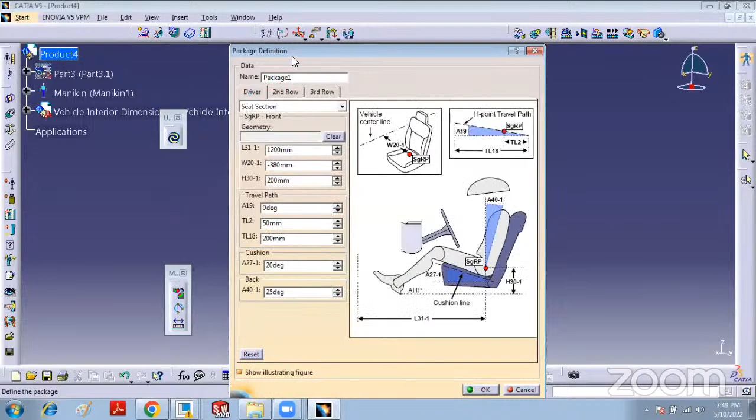இப்போ நம்ம டிரைவர் டிசைனில் சீட் செக்ஷன் டிசைன் பண்ண போகிறோம். அதுக்கு வந்து என்னோடய ஸ்டியரிங் வீல் இங்கே இருக்குது, என்னோடய லெக் ரெண்டையும் இங்கே வச்சுக்கலாம். ஸோ என்னோடய மீதி 2 பாயிண்ட்ஸ் இருக்குது. இந்த பாயிண்ட்ஸ்லாம் என்னன்றதை முதல்ல நம்ம ஹியூமனை வந்து இந்த பர்டிகுலர் ஏரியாவில் டெசிக்னேட் பண்ண அப்புறம் நம்ம அண்டர்ஸ்டாண்ட் பண்ணலாம் ஈஸியாக.

முதல்ல நான் ஒரு பேக்கேஜை வந்து டிசைன் பண்ணிட்டேன். இப்போ என்னோடய ஹியூமனை வந்து இந்த பேக்கேஜுக்கு ஏற்ற மாதிரி நான் அலைன் பண்ணணும். I'm selecting the human and the package definition. I make it okay. Now automatically the human will come and sit in his position.

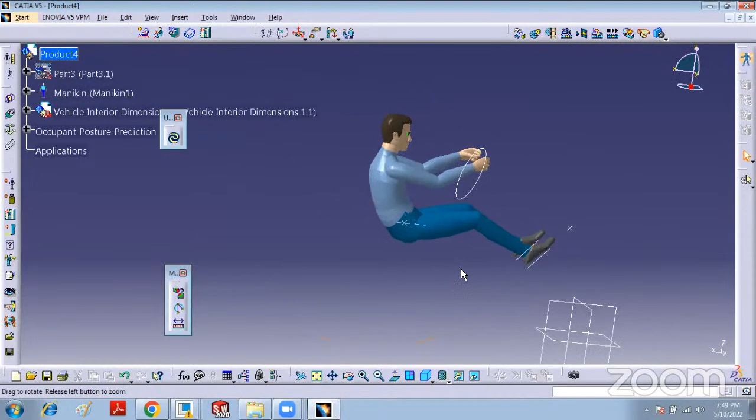இதுதான் இங்கே பியூட்டிஃபுல்னஸ். இதுதான் the hip point, steering wheel, so leg sections, and this is the end point of the vehicle. இதுதான் நம்மளோட மேக்ஸிமம் end point. இதுக்கு மேலே வெளியில் நம்ம போகக்கூடாது.

ஒன்ஸ் ஒரு டிரைவரை பொசிஷன் பண்ண அப்புறம் என்ன பண்ணுறோன்னா நம்மளோட காரை நம்ம இம்போர்ட் பண்ணிக்கலாம் வேணும்னா. இல்லைன்னு சொன்னால் முதல்ல இப்போ சார் சொல்கிற மாதிரி முதல்ல ஒரு டைனமிக்ஸ் வந்து ஒரு மெக்கானிசம் வந்து டிசைன் பண்ணுறாரு. பட் எனிவே இப்போ காரை முதல்ல நான் சொல்லிட்டனால அவர் இம்போர்ட் பண்ணிட்டாரு. ஸோ இம்போர்ட் பண்ணி சீட்டில் வந்து கரெக்டாக உட்காந்துருக்கிற மாதிரி நம்ம ட்ராக் பண்ணி மூவ் பண்ணி உட்கார வைக்கணும். இதுதான் நம்மளோட மெயின் வேலை.

இது வந்து நம்ம அக்யூரேட்டாக இப்போ வந்து அப்ராக்சிமேட்டாக தான் பண்ணுறோம். நீங்கள் ரொம்ப அக்யூரேட்டாக பண்ணும்போது நீங்கள் ப்ராப்பராக எடுத்து உட்கார வைக்கணும். வச்சுட்டு நம்ம என்ன பண்ணலான்னா யூ கேன் ஆல்வேஸ் கிவ் த மூமெண்ட்.

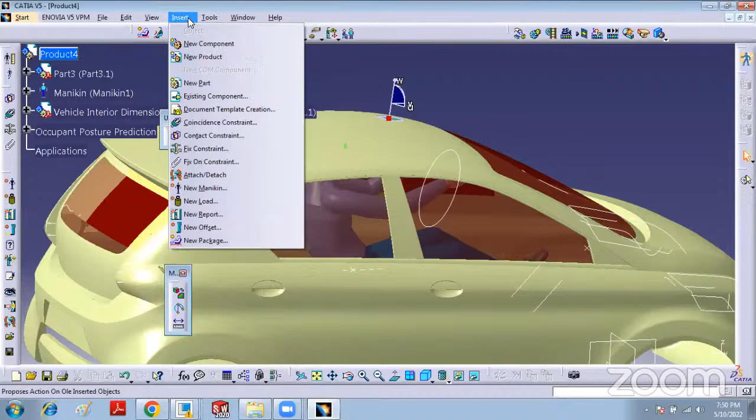வி கால் இட் அஸ் digital mock-up kinematics in CATIA, which is a very excellent simulation tool in CATIA. What you can do is you can hide the car, அதை இல்லை கார்த்தி நீ ஹைட் பண்ணிடு. ஆமாம், நீ காரை ஹைட் பண்ணிவிடு, அப்புறம் வேணால் நம்ம எடுத்துக்கலாம்.

ஆமாம். ஸோ now what we are trying to do is we are going to give movements to the human hand and legs, so that we want to find out whether the placing of the steering wheel, the accelerator and the pedal is exactly positioned, இல்லை நான் மாற்றணுமா அதோட டைமென்ஷன் மாற்றணுமா அப்படின்றத நான் செக் பண்ணுறதுக்காக பண்ணுறேன்.

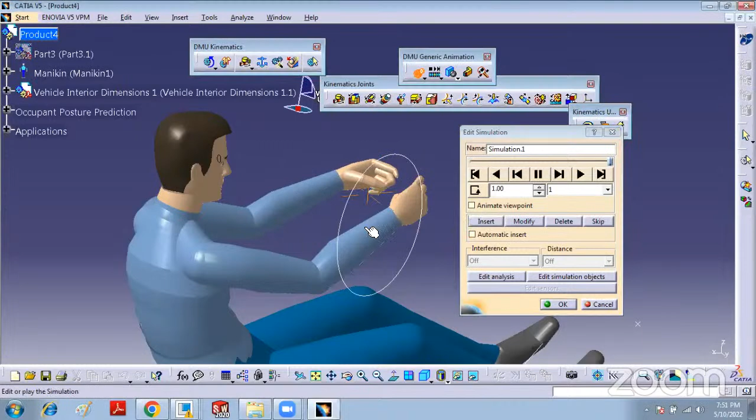பட் நாங்கள் பண்ணுறது எல்லாமே அப்ராக்சிமேஷன் தான். இட்ஸ் நாட் த எக்ஸாக்ட் திங், பட் we are trying to understand how in real time the positioning of these particular components are being done, especially the brake, the pedal, the accelerator pedal, the footrest, the steering wheel, the size of the steering wheel, the position of the steering wheel எப்படி பண்ணுறாங்க அப்படின்றது இந்த மாதிரி கைனமேட்டிக் சிமுலேஷன் வச்சு தான் பண்ணணும்.

ஸோ யூ டூ அ சிமுலேஷன், ஆட்டோமேட்டிக்லி யூ கேன் see how the components behave. நீங்கள் கொடுத்த மூமெண்ட்ஸ்லாம் எப்படி நடக்குதுன்றதை நீங்கள் கிளியராக பார்த்துக்கலாம். இன்னும் நல்லா நீங்கள் கொடுக்கலாம், இன்னும் நீங்கள் எக்ஸலண்ட்டாக கொடுக்கலாம்.

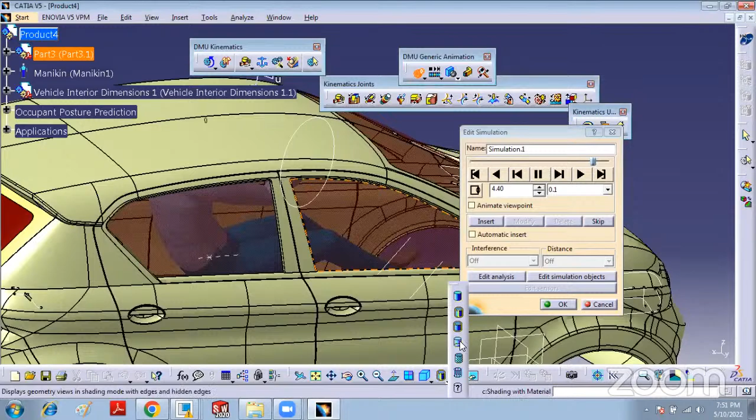நீங்கள் காரை வந்து பாடியை ஓப்பன் பண்ணி வச்சுக்கிட்டு அதுக்கு வந்து ஒரு ஒயர் ஃப்ரேம் மோட் வச்சுட்டிங்கன்னா நீங்கள் கிளியராக விசிபிளாகவே பார்க்கலாம். எங்கேயாவது இடிக்குதா கால், கை எங்கேயாவது இடிக்குதா, ஸோ கன்வீனியண்ட்டாக இருக்குமா இருக்காதா ஹியூமனுக்கு அப்படின்றத you can easily visibly see in the screen.

So this is how ergonomics designs can be done in automotive sector, which is completely research and development. These modules are widely used in R&D in industries, and this plays a big role for engineers like you. If you are really expertise in these modules, I'll tell you, people will grab you in the market.

இது நிறைய பேர் கற்றுக்கிறது இல்லை, அதுதான் தப்பு பண்ணுறீங்க. நிறைய பேர் வந்து ஏதோ பேசிக்ஸ் தெரிஞ்சுக்கிட்டு இது போதும் எனக்குன்ற மாதிரி பார்க்குறீங்க. கிடையாது. சாஃப்ட்வேர்ஸ் ஆர் ஓஷன், நிறைய விஷயங்கள் இதில் இருக்குது. தீஸ் ஆர் சம் ஆஃப் த இன்புட்ஸ் வி கேன் கிவ்.

We want to make sure that this seminar is an eye opener for you guys. எங்கெந்த ஏரியாலலாம் நிறைய ஓப்பனிங் இருக்குன்னு தெரிஞ்சுக்கிறதுக்காக நாங்கள் இதை காட்டுறோம்.

ஸோ the final session is this presentation, the video presentation of MSC Nastran and Patran. இதில் வந்து எப்படி வந்து ரியல் டைம் வேலிடேஷன் வந்து பண்ணுறாங்க, சாஃப்ட்வேர் யூஸ் பண்ணி பண்ணுறாங்க அப்படின்றத நீங்கள் பார்க்கலாம். பியூட்டிஃபுல் ப்ரெசன்டேஷன். ஸோ திஸ் இஸ் MSC Software.

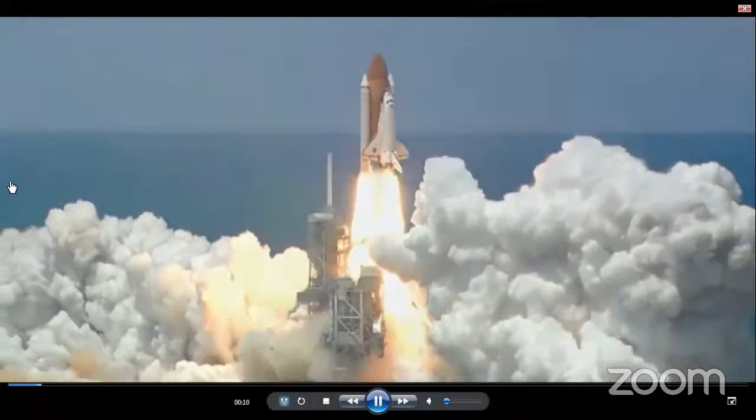This software has been introduced in the market in 1965. This is one original software which is having a big market value in the world. இது வந்து as far as the software has been introduced by NASA. Actually the NASA software, we are the only authorized trainers in Chennai here.

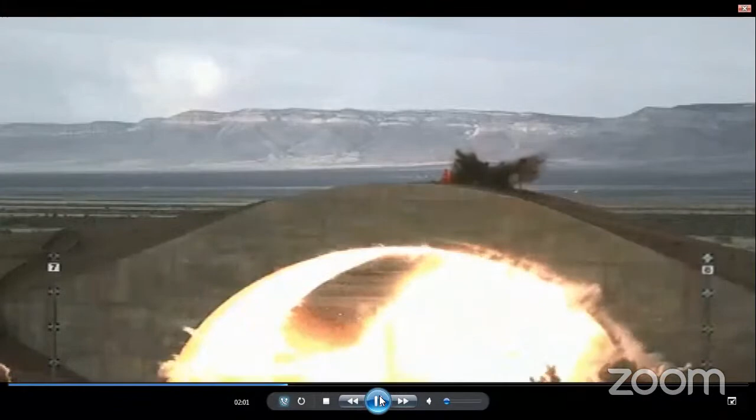Easy5 is one software which is widely used in aircrafts, especially for aircraft wings, extended slats, flaps. We can validate how all this affects lift without causing problems.